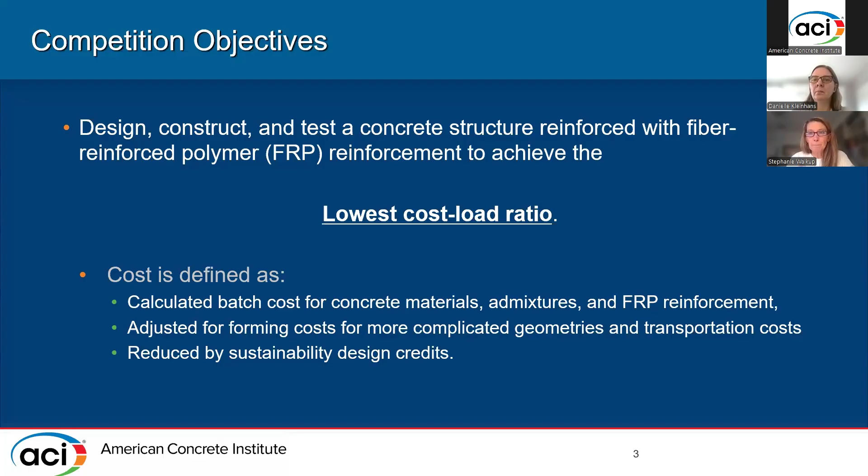One of the other objectives is for you to develop a presentation, again in PDF format, on your specimen design and calculations. You'll include details that are provided in the official mix and cost form, and we want to know the type of failure of your member that you expect to occur. You can predict the failure load and the type of failure using ACI code 440.11-22, which is our newest building code requirements for structural concrete reinforced with glass fiber reinforced polymer bars.

You'll then comply with the rules and the associated dates. Just because we've provided Chapter 22 of the sectional strength of ACI code 440.11 to you, you are permitted to use other calculation procedures or structural modeling procedures to predict failure type and load. So you are not limited to this code document, but we do provide Chapter 22, the sectional strength chapter, to you for your use.

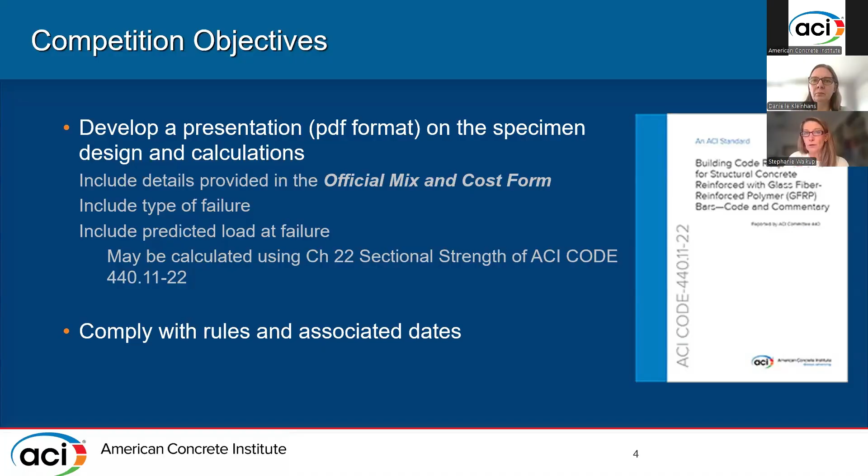We have some learning objectives associated with the competition. One is to understand the similarities and differences between steel and glass fiber reinforced polymer reinforcing bars. We'll start there, and then move through the other learning objectives as we go.

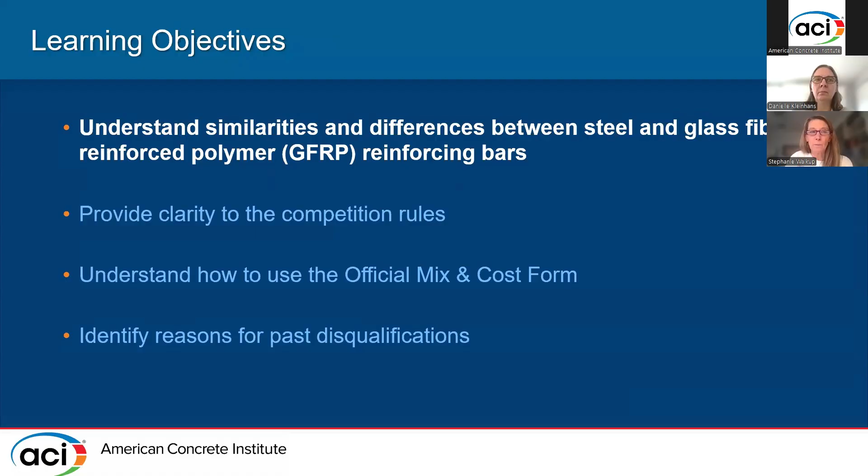Let's talk about FRP versus conventional steel reinforcement. Conventional steel reinforcement is susceptible to corrosion, and as a result of corrosion, which produces expansive forces, concrete can deteriorate and fall off of our concrete members. This reduces the life cycle of our concrete members, and it's not a very sustainable design when this corrosion occurs.

Our FRP materials are a good alternative to reduce corrosion from occurring in these members. Glass fiber reinforced polymers, as well as others, do not rust or degrade from water, chlorides, or chemicals. Because they're non-corrosive, we have longer life cycle and lower life cycle costs.

In addition, FRP bars have a high strength to weight ratio and reduced costs. They're up to 75% lighter than traditional steel reinforcement and have higher tensile strength. This makes them easier to transport, handle, cut, and install, which also reduces transportation and labor costs.

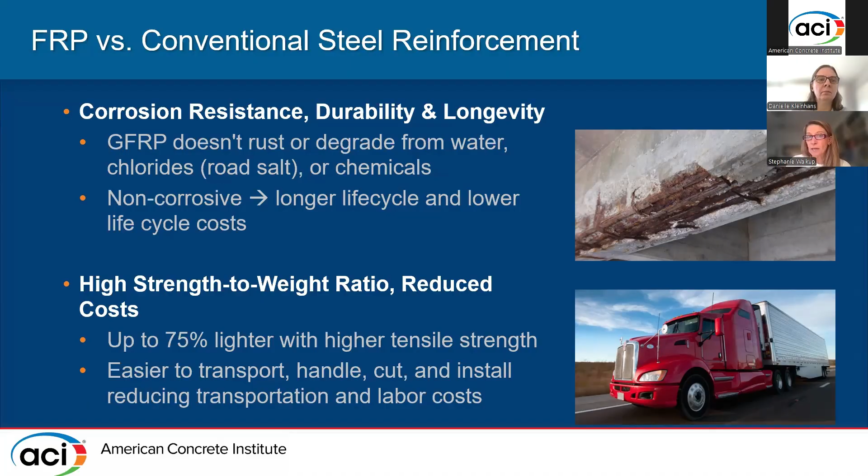They are also non-conductive and non-magnetic as well, and GFRP, as a result, is perfect for sensitive applications like MRI rooms, utility structures, and other areas needing electromagnetic neutrality.

GFRP production actually generates fewer CO2 emissions. It uses less energy, and it can enable the use of seawater and sand, supporting greener construction as well. So there are environmental advantages to the bars as well.

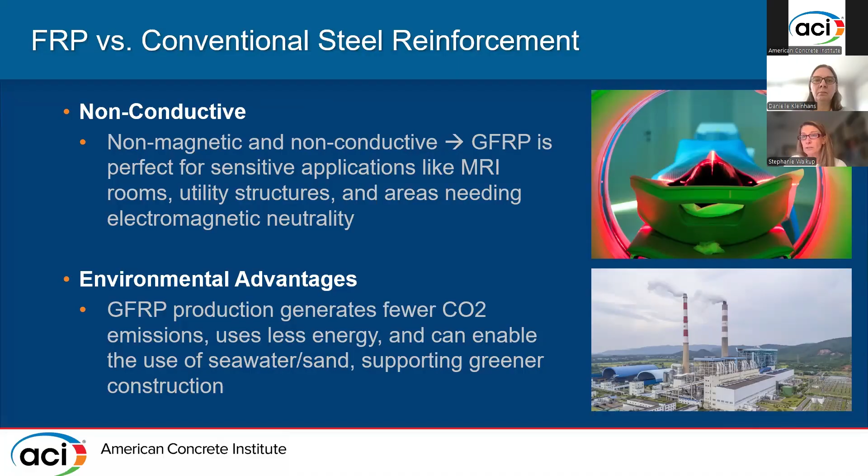In terms of the reinforcing bar properties, we're first going to break this down into the FRP fibers, and then also talk about the epoxy matrix, and then we'll see what happens when we put them together.

If you take a look at the stress strain diagram, we can see that the fibers of the FRP bar are actually stiffer than the epoxy matrix. So when we combine the fibers with the matrix, we end up with a composite bar that has a smaller modulus of elasticity than the fibers, but a higher modulus of elasticity than the epoxy matrix.

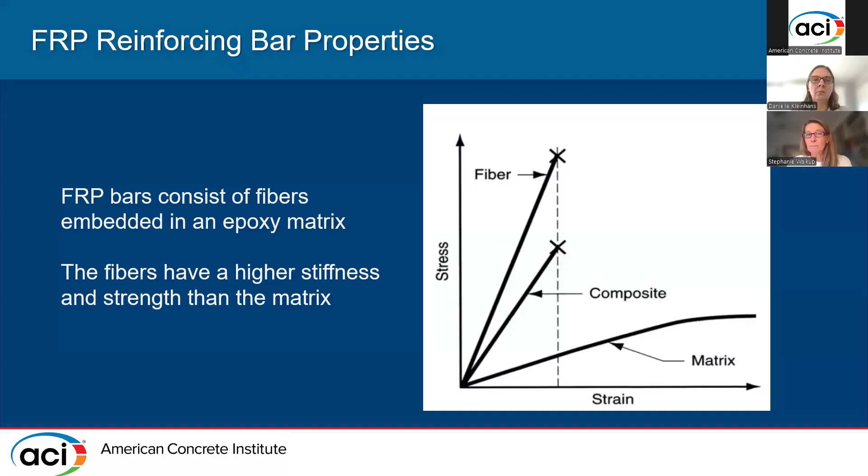When we compare the bars—here we're showing basalt, aramid, and glass bars, along with carbon bars—to our pre-stressing steel or mild steel, we can see that the basalt, aramid, and glass bars have a smaller modulus of elasticity, where they're not as stiff as steel bars. However, they have a higher tensile strength.

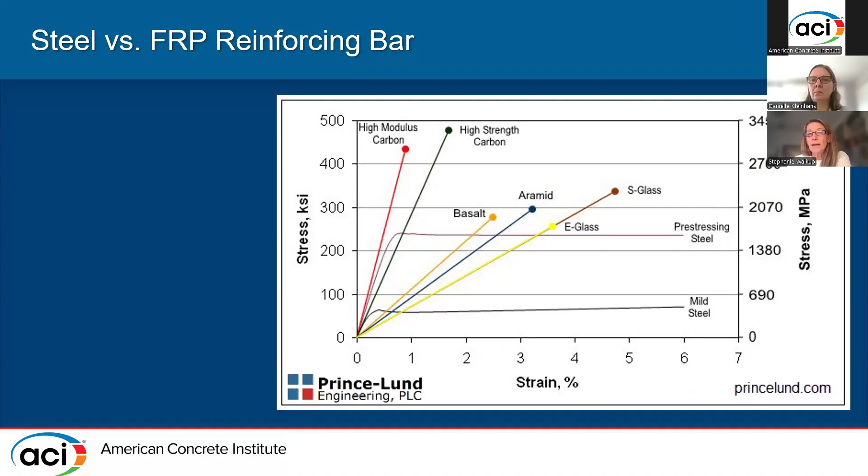Carbon matches approximately the modulus of elasticity of traditional steel bars, but has an even higher tensile strength than our basalt, aramid, and glass bars.

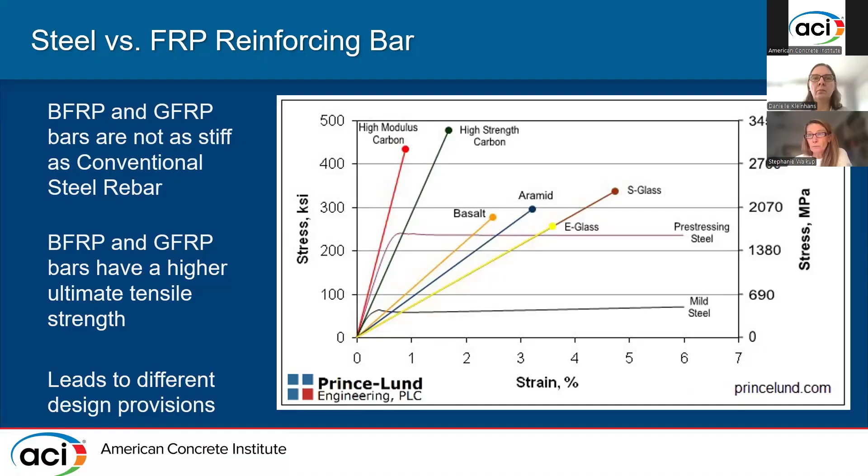As a result of these different material properties, we have different design provisions, and that's what prompted the development of ACI code 440.11-22.

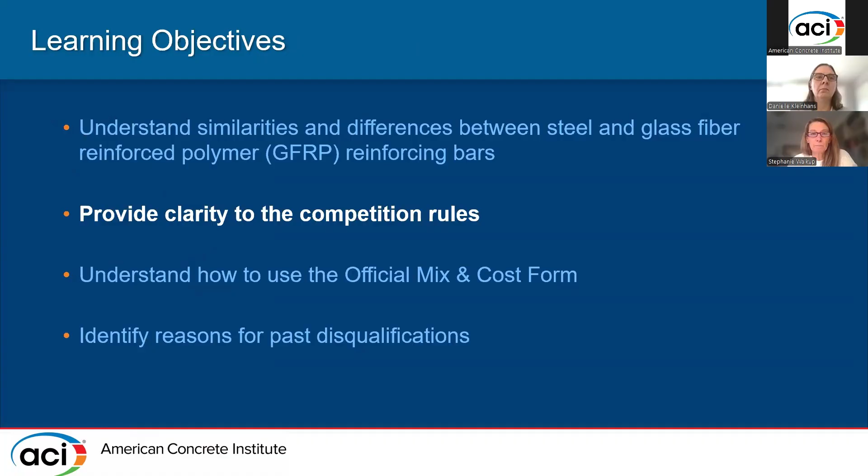We no longer measure displacement of the member as it's being tested, but we are only looking at the ultimate strength that the specimen achieves.

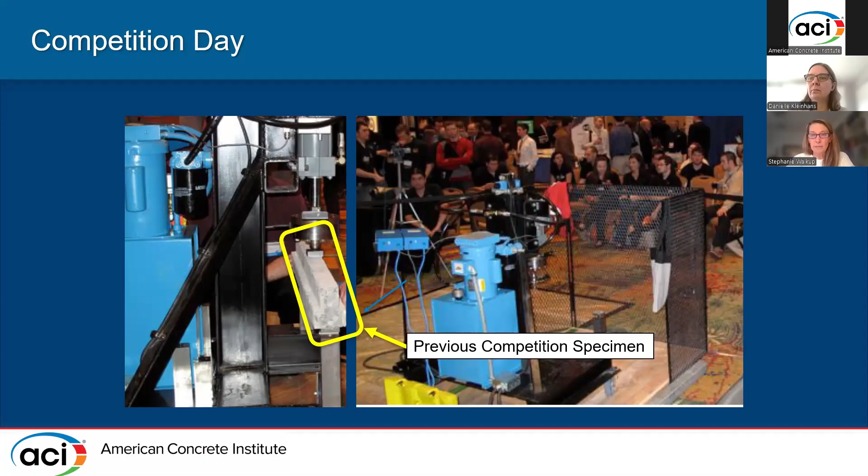So some selected rules that I've pulled out: each school may only enter 1 team. If your school has been participating in this competition for a longer period of time, you may remember that there was a point where we allowed 2 teams to enter, with 2 types of structures permitted. We now allow only 1 team to enter, and there's only 1 type of structure that's permitted.

Each team must have a supervising faculty advisor, and each team must consist of at least 2 and not more than 8 students enrolled in an undergraduate program at any college or university worldwide. It is strongly recommended that at least 1 team member is present during testing of the structure on competition day.

We have had situations where the supervising faculty advisor was the only one present. If you're present, you will be the one that will place your member in the testing machine prior to load application.

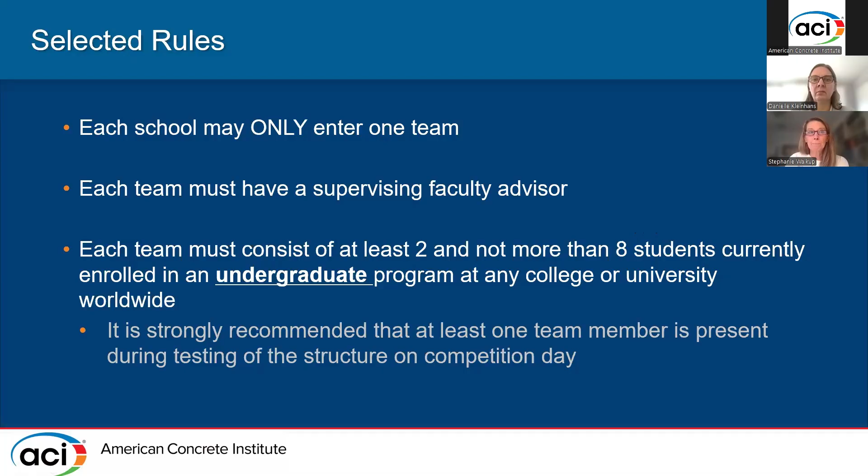Going back to the different types of structures that were permitted previously, we had straight and prismatic, or type 1 structures, and then we had straight but not prismatic, or prismatic but not straight. These type 2 structures are no longer permitted in the competition.

Prismatic and straight members are members that must have a constant flexural stiffness, EI, across their span. The cross-section is symmetrical and constant.

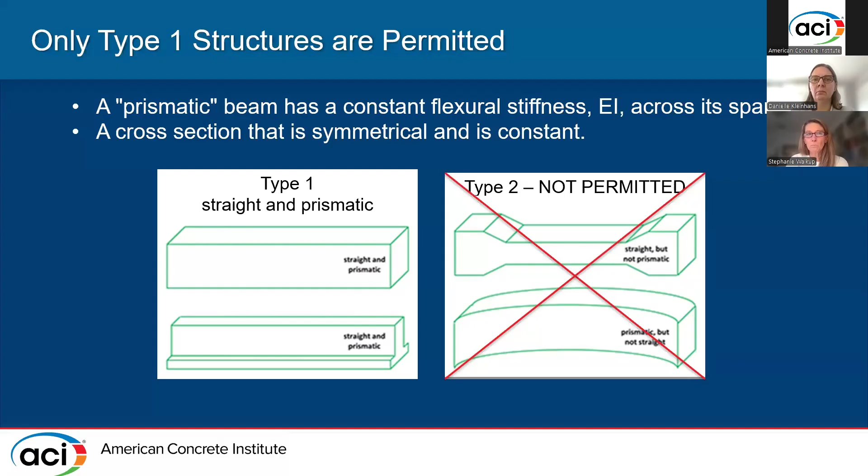We can see here that the length of the specimen must be at least 950 millimeters and must not exceed 1,000 millimeters or 1 meter. We have a center-to-center span of 900 millimeters, so the additional 50 millimeters allows us to have some overhang at each of the simple supports.

The structure must fit into a box measuring 200 millimeters by 200 millimeters by, again, 1 meter or 1,000 millimeters long, and it must weigh between 5 kilograms and 15 kilograms.

You will mark an X designating the 2 loading points that are spaced 250 millimeters apart from the mid-span. We can see that the load is applied now through a spreader beam. The load that we will measure for the ultimate load for the member is the load P at the top. That load P is then spread to 2 point loads that are applied to your specimen, again spaced 250 millimeters apart.

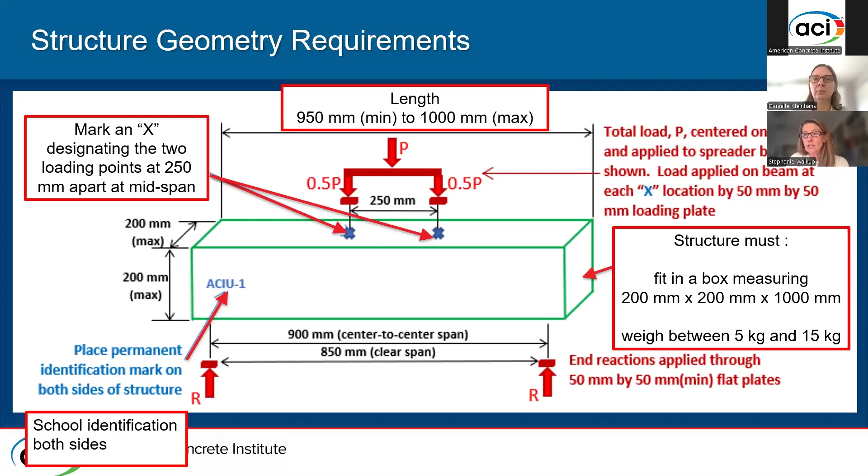The load is applied at each of the X locations by 50 millimeter by 50 millimeter loading plates.

We ask all schools to provide an identification mark on both sides of their beams, indicating the school identification. This may be put on with permanent markers.

Again, the end reactions, as well as the mid-span applied loads, are applied through the 50 millimeter by 50 millimeter flat plates.

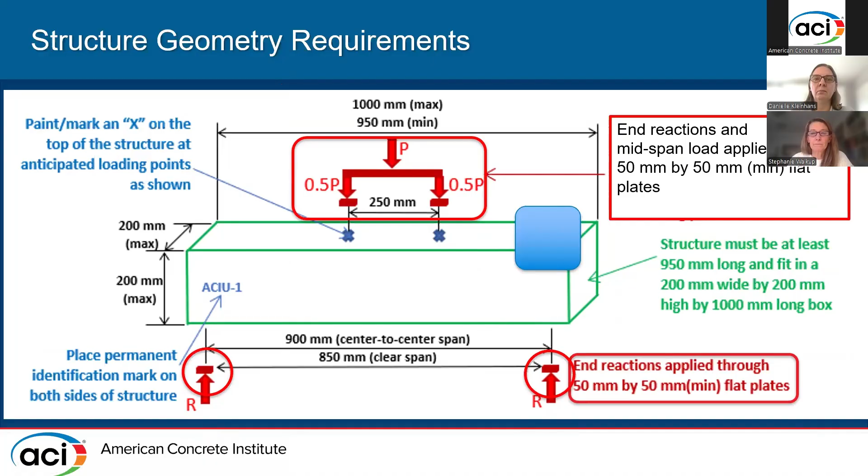The concrete materials that are permitted are those listed in the official mix and cost worksheet. For cementitious materials, you are permitted to use Portland cement, blended cement, slag cement, fly ash, or silica fume. Cementitious materials may not be used to coat reinforcement as a bond-enhancing agent.

Aggregates must be non-metallic, and there was a question that was sent in previously to ACI regarding fibers. Fibers are not classified as aggregates, and fibers are not permitted to be used in your concrete matrix.

Only chemical admixtures meeting either ASTM C260, or chemical admixtures meeting ASTM C494, types A, C, E, F, G, and S are permitted. The different admixtures have varying costs, and you can see those in the mix and cost worksheet.

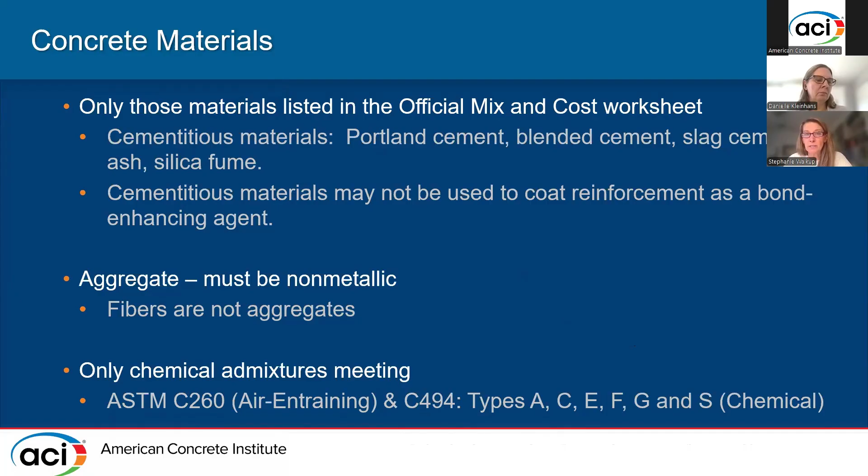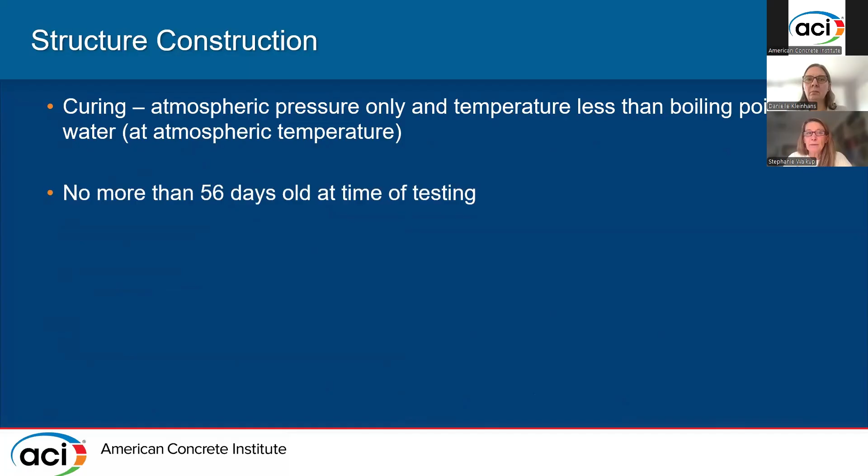For your structure construction, curing must be at atmospheric pressure only and temperatures less than the boiling point of water. The structure may be no more than 56 days old at the time of testing, and no reinforcing supports are permitted in the 850 millimeter clear span.

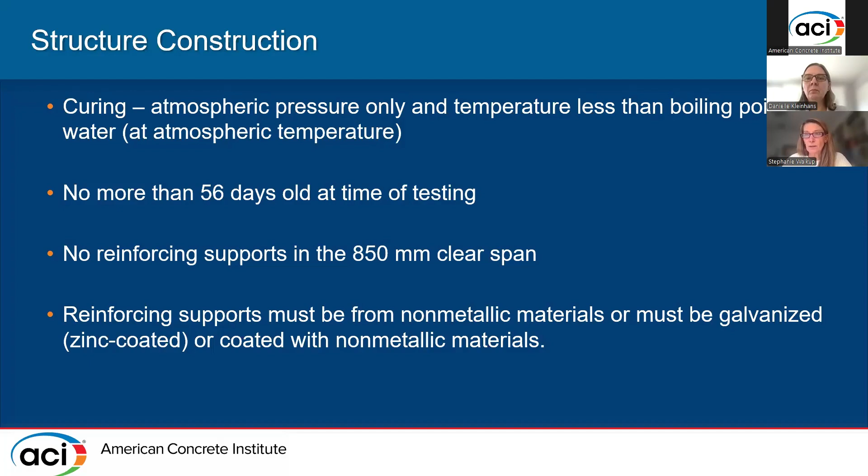Reinforcing supports must be made from non-metallic materials, or they must be galvanized, zinc-coated, or coated with non-metallic materials. This has been a point of disqualification in the past.

Reinforcement must be the FRP reinforcement that is provided to you by ACI in our official kits. This has also been a point of disqualification in the past when we've identified bar sizes that are larger or of a different manufacturer than what we have provided.

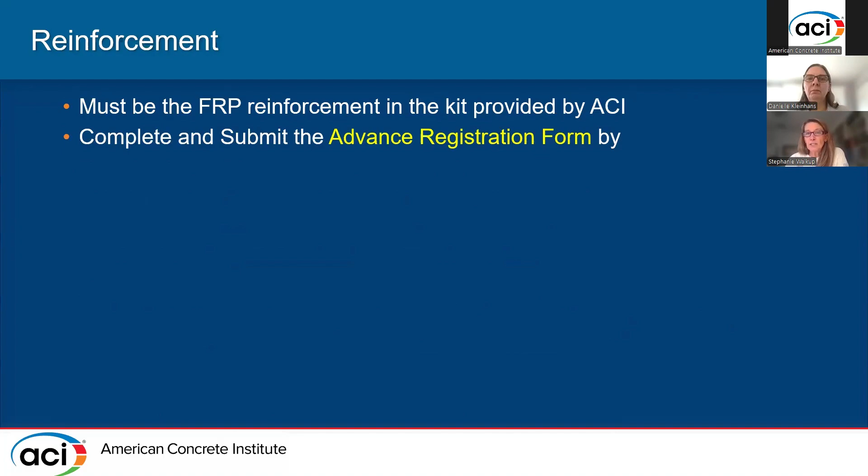Student teams must complete and submit the Advance Registration Form again by February 3rd to receive their kits. You also must include, at a minimum, one full piece of FRP bar. That bar may be cut in any manner that you wish.

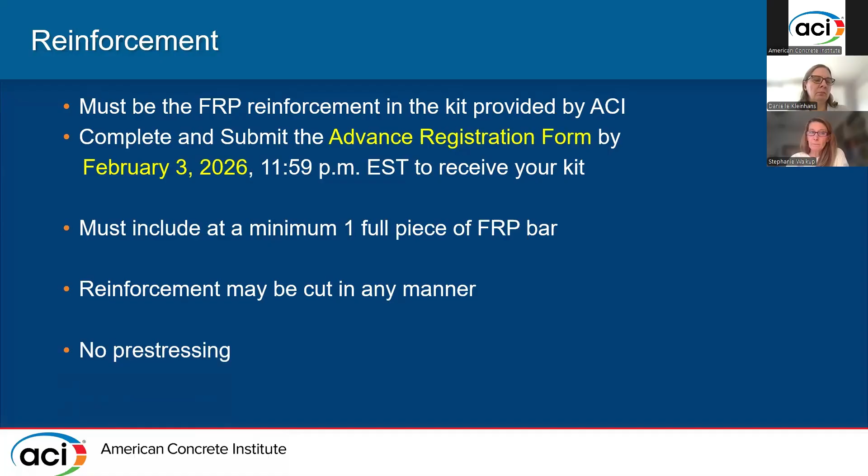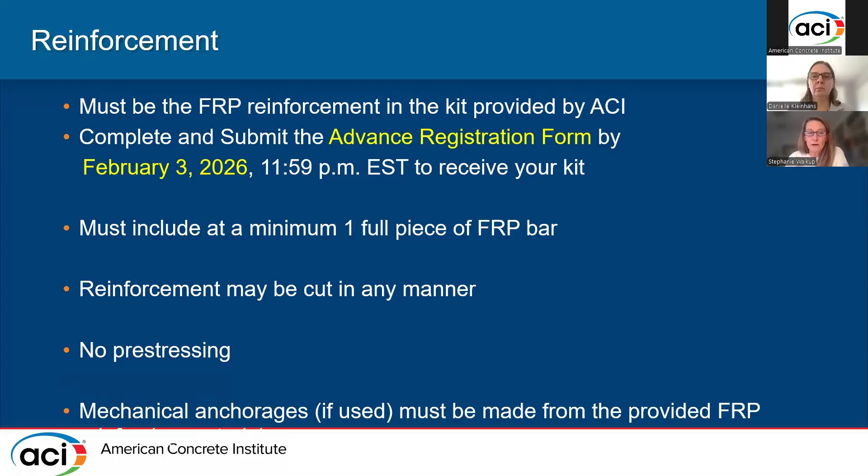No pre-stressing of any of the bars is permitted. And mechanical anchorages, if used, must be made from the provided FRP bars in the official ACI kit.

The permitted FRP bars that are going to be provided to you in your kit, if you have not received it yet, include the following 6: Strongwell composite bar, MST bar, Pultrall VROD, SFTec SFT-BAR, Gatorbar, and Mateenbar Greenbar2X. They are all identified by a colored tape that will be wrapped around the bars when you receive your kit.

You can also compare the images of the bars to the bars when you pull them out of the kit, in case any of the tape has been rubbed off in the process of shipping.

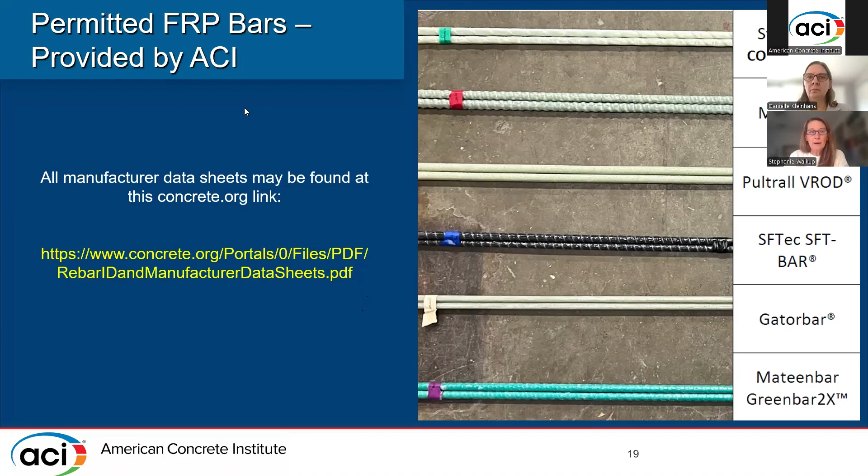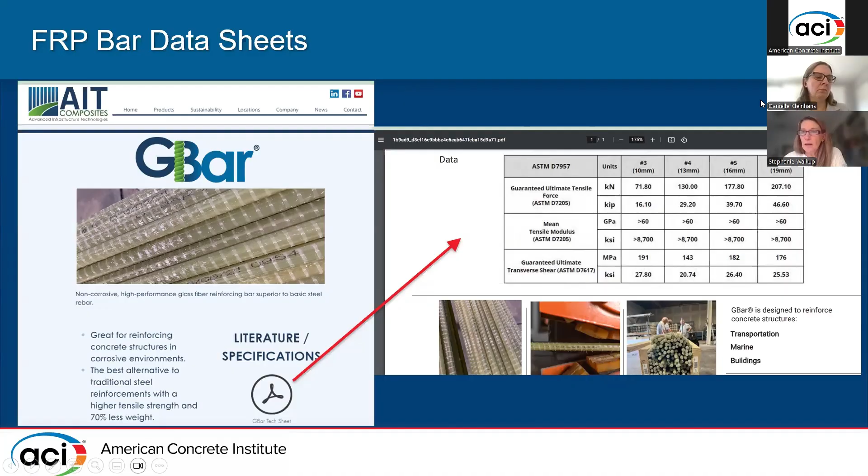Items that are included in the data sheets include the guaranteed ultimate tensile force of the bar, as well as the mean tensile modulus, and the guaranteed ultimate transverse shear. The first two are the primary materials that you're going to want to investigate and use as part of your strength calculations.

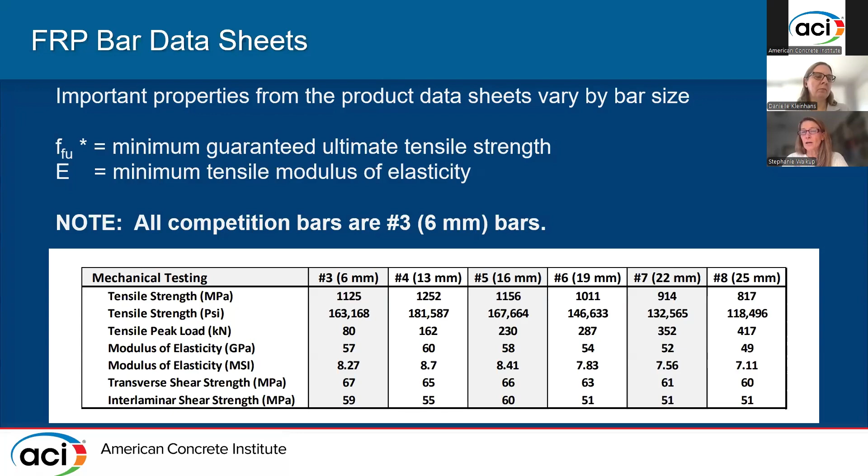As mentioned, the important properties of the bars will be provided to you in the product data sheets. It's important to note that these strengths and stiffnesses may vary by bar size, and an example of that is provided here. All competition bars included in the kit are number 3 bars, so if you open the manufacturer's data sheet, you are looking for material properties associated with a number 3, or 6 millimeter, bar.

As mentioned before, ACI 440 and ACI as a whole are providing Chapter 22, Sectional Strength, of ACI code 440.11-22 to you. This may be used to calculate the flexural strength and shear strength of your member. You can also look at bearing strength and other strengths associated with this chapter.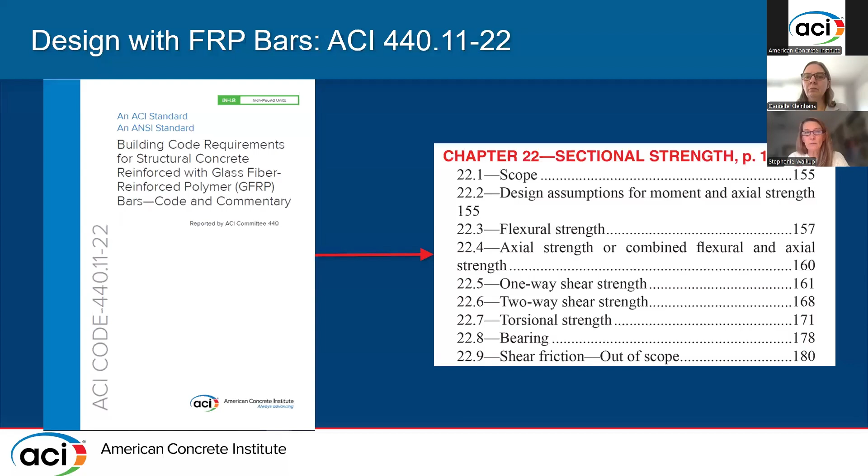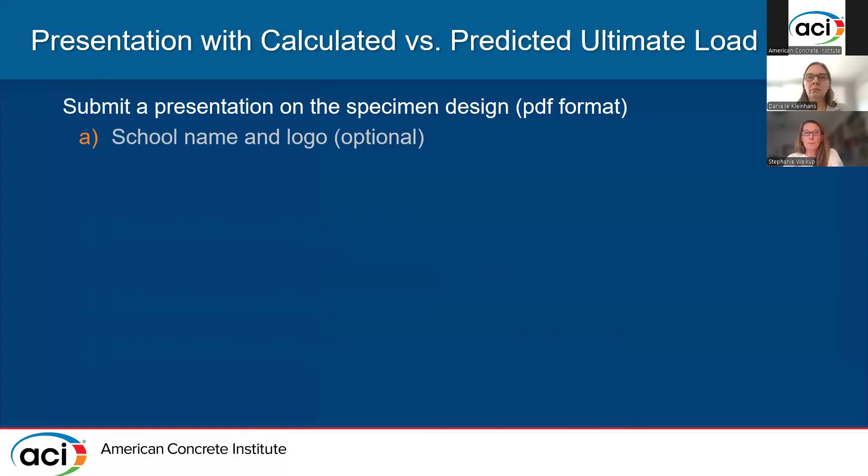For the presentation, you can include calculated as well as predicted ultimate loads. You'll submit the presentation on the specimen design in PDF format. You must include your school name, your logo which is optional, your structure identification mark, the student team member names, and your faculty advisor.

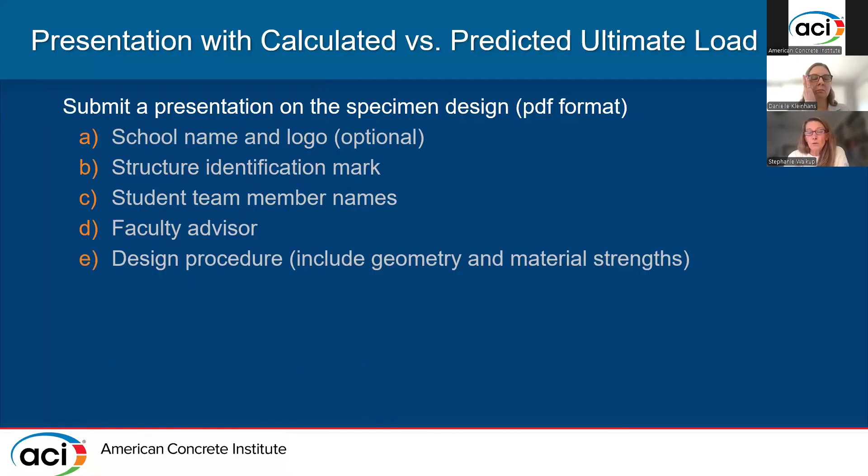You'll then move into your design procedure. In order to present a design procedure, you'll need to share with us the geometry of your cross-section, the length of your member, and predicted material strengths based on your concrete mix design. The calculated ultimate load should also be included, including the theoretical type of failure.

Again, you may use ACI 440.11-22, Chapter 22, or you may calculate the ultimate load using other techniques. You'll also provide a predicted ultimate load, and this can vary from what you calculate. Maybe you are predicting a certain concrete strength and you think you didn't achieve that, and you want to predict a load that is a little less than what you've calculated.

Maybe you anticipate your strengths being higher and your bar being slightly stiffer than what the manufacturer reports. Maybe you want to increase the ultimate load that you intend to achieve. Again, this is up to the team individually, and we're looking to see both the calculated load and the predicted ultimate load. They may be the same, but they may also vary. If they vary, we do ask that you provide an explanation of the difference.

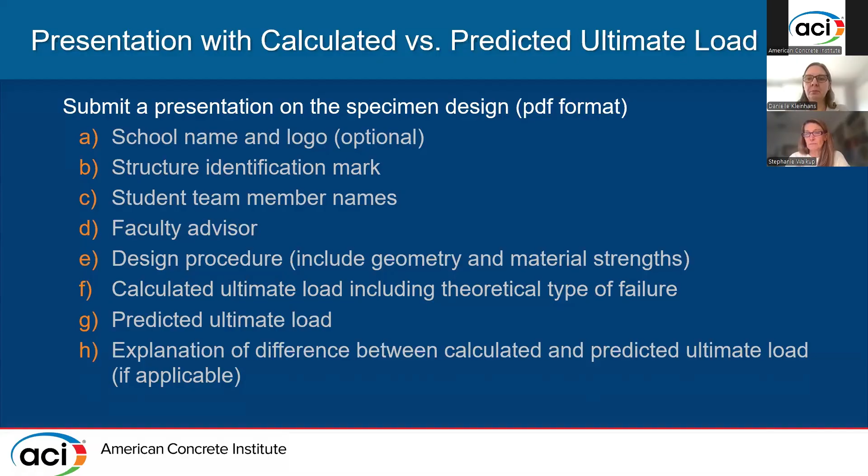I've mentioned this a few times previously, so I won't spend any more time here, but this is just the code document that will be provided to you.

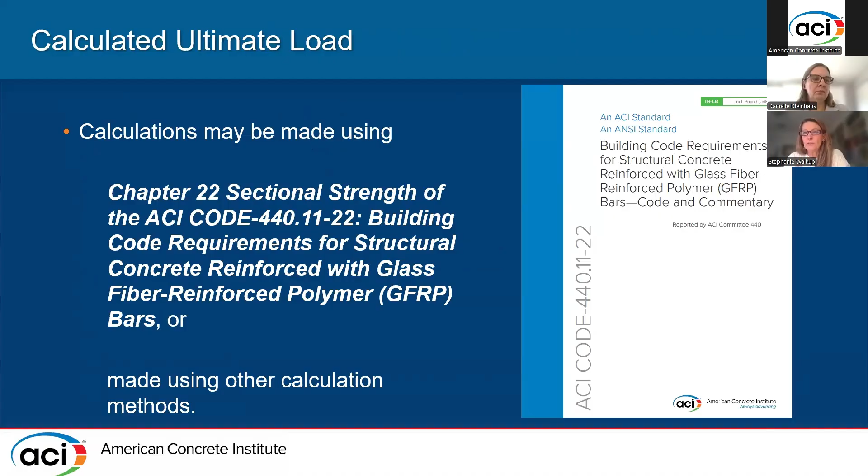Next, let's move into the official mix and cost forms. Some modifications have been made to this form since the previous competition. We have included a tab 5 this time. So when you open the official mix and cost form, there are 5 tabs at the bottom of the form now instead of 4. The instructions are included in tab 1. Then you will utilize either tab 2A or 2B to do your actual mix and cost work.

Tab 3 is where you will develop and place your FRP reinforcing diagram. We want to see the cross-section of your member, the length of the member, as well as where you're placing reinforcement and the lengths of the reinforcement. You should identify the manufacturer of the bar that you have selected as well. Tab 4 is unit conversions that are embedded in the spreadsheet, and there is no work for you to do on this tab.

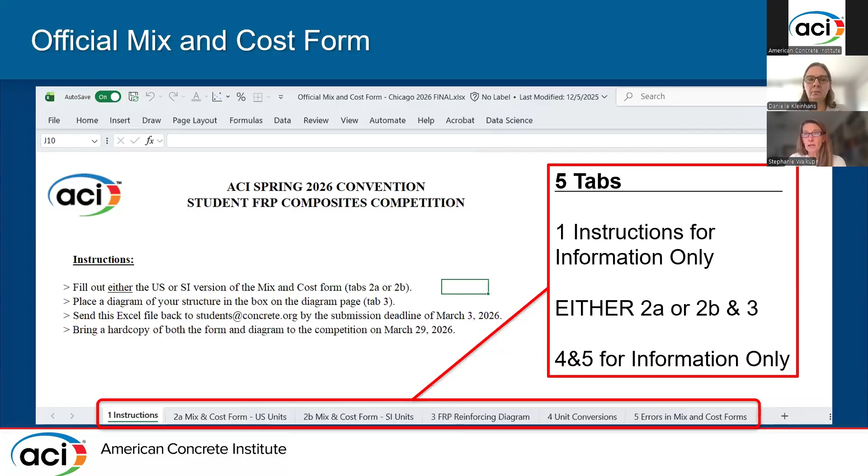Because students have had difficulty understanding the mix and cost form in the past and have submitted forms with errors to our committee, we have provided some checks along the way in the spreadsheet. If errors occur in the spreadsheet as you move through it, those errors are explained in tab 5, Errors in Mix and Cost Forms. We thought this would be an easier approach rather than you sending the mix and cost form to us in an incorrect manner and us sending it back to you.

With the official mix and cost form, the spreadsheet tabs are locked down so that you may only enter data in the light blue cells. As mentioned, you'll work with either tab 2A or sheet 2B. 2A provides US units and tab 2B uses SI units. Make sure to complete all cells in the mix and cost form, or it will be returned to you. If a value is 0, not applicable, or none, simply enter 0, NA, or none.

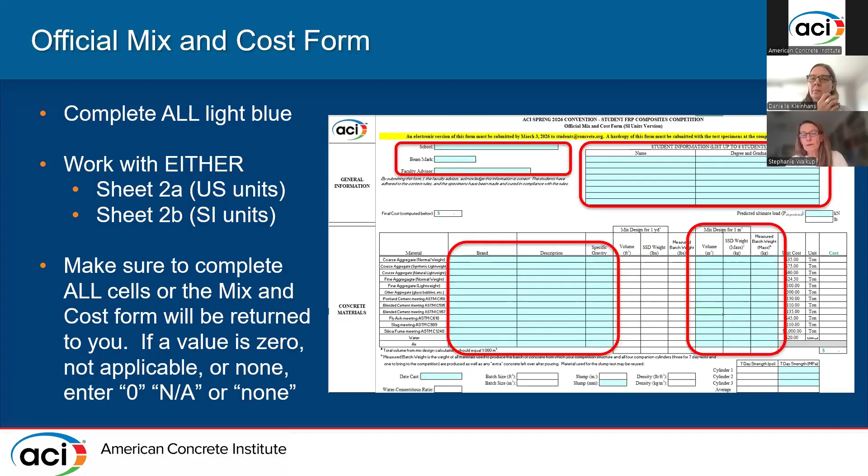This is an example of the form where you can see the general information at the top: your school, your beam mark, the faculty advisor, and all of the student names with degree and graduation dates. There is also a cell for entering your predicted ultimate load. Please don't forget this isolated cell.

We have returned mix and cost forms for students who have not entered that value. As a reminder, students are to be at the undergraduate level for this competition. The concrete materials available have been expanded because we identified student teams using more than one lightweight material in their concrete mixtures. In the past it was coarse aggregate, fine aggregate, and lightweight aggregate. We have now broken that down into synthetic lightweight coarse aggregate, natural lightweight coarse aggregate, and fine lightweight aggregate.

You can see those expanded right here. Synthetic lightweight aggregate is manufactured aggregate, often by heating clays and shales, and is defined primarily by expanded clay or shale. Natural lightweight coarse aggregates are sourced from volcanic sources like pumice or plant-based materials. Fine aggregate, like sand, is defined as that passing a 4.75 millimeter sieve, whereas coarse aggregate, like gravel or crushed stone, is retained on the 4.75 millimeter sieve. As noted earlier, fibers are not considered an aggregate and are not permitted in the competition.

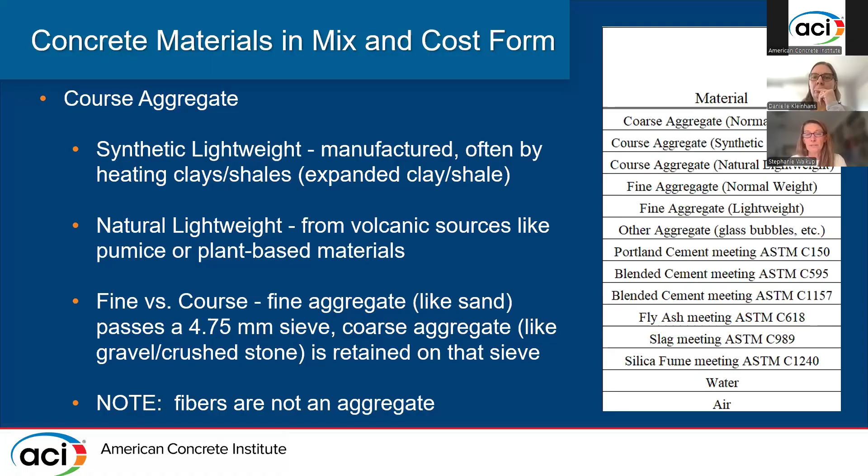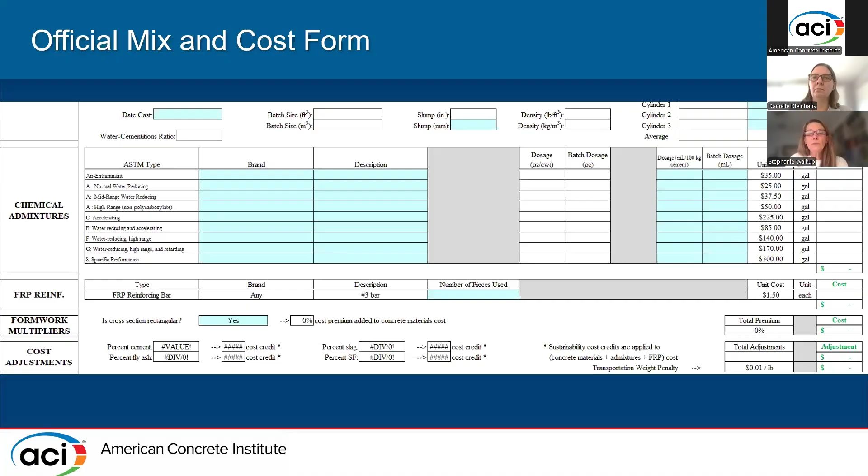The rest of the spreadsheet calculates automatically in a pre-programmed state. If you have any errors, they are most likely to occur in the total volume for the mix design. Here we have a mix design for 1 cubic meter, meaning when you total up your volumes, you should total up to 1.00 cubic meters. If you were working in US units, your mix design should total up to 27.0 cubic feet, which is the equivalency of 1 cubic yard.

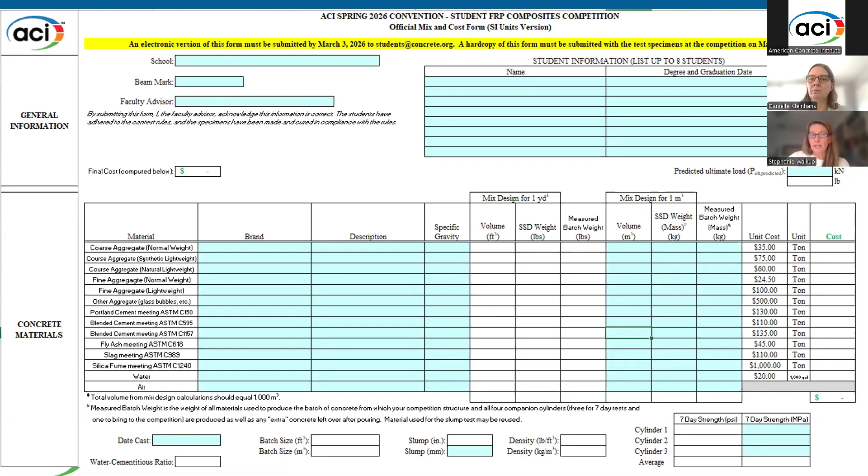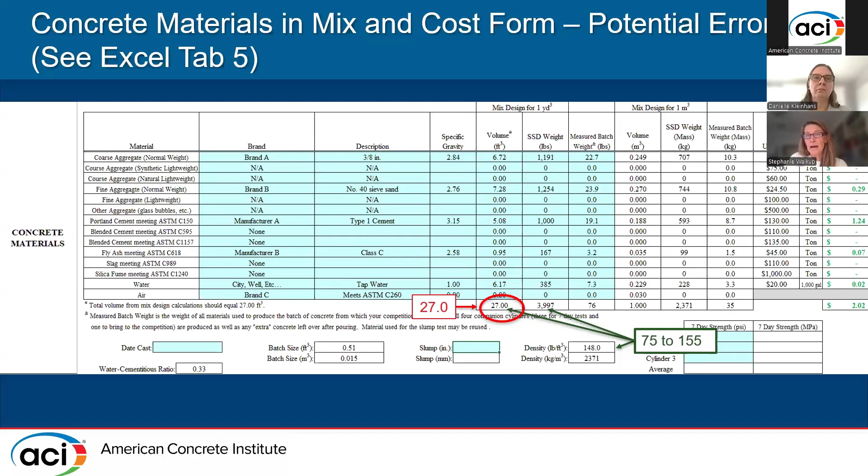We also see that the volume and the saturated surface dry weights are used to calculate density in your spreadsheet. The spreadsheet is set up with pre-programmed cells to calculate density based on the saturated surface dry weights and volume you enter. If this density is not between 75 to 155 pounds per cubic foot, you will receive an error in your spreadsheet, explained in tab 5.

The water to cementitious ratio is also calculated for you by the spreadsheet. It is equivalent to the weight of water divided by the weight of all the cementitious materials, including the blended cements, Portland cement, fly ash, slag, and silica fume. Batch size is calculated automatically and is equal to the batch weight divided by the density.

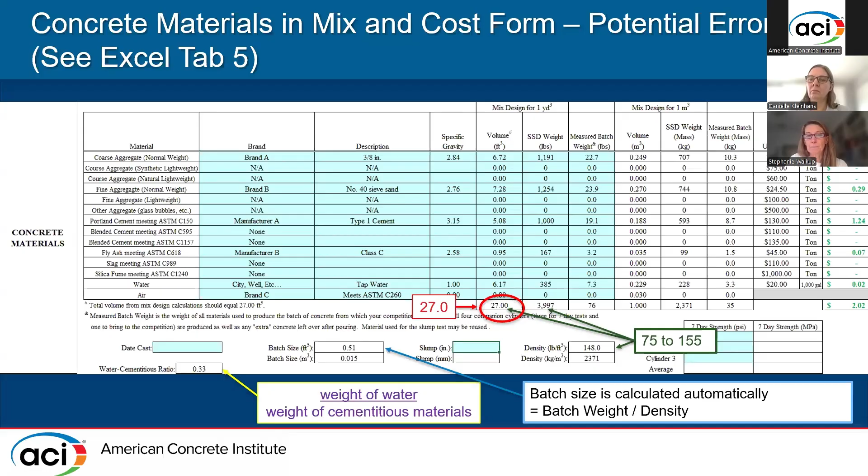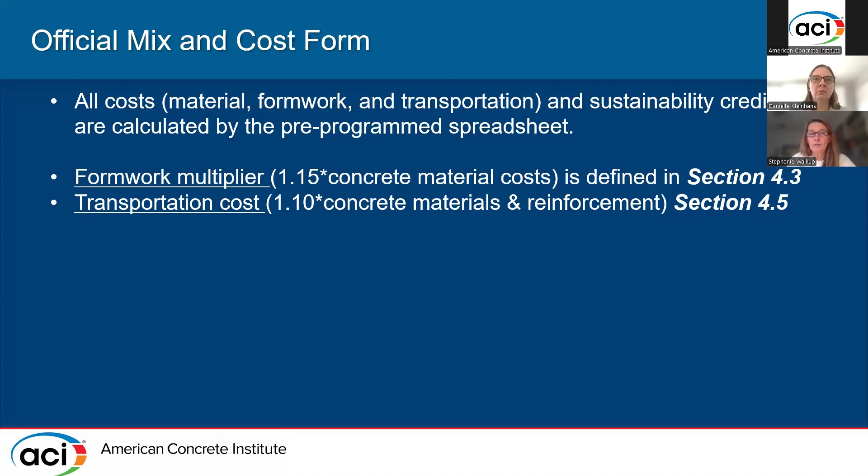All costs and sustainability credits are calculated in the pre-programmed spreadsheet. A formwork multiplier of 1.15 is multiplied by the concrete material costs when you do not have a fully rectangular cross-section, explained further in section 4.3 of our official rules. Transportation cost is new and is related to the concrete materials and reinforcement, a factor of 1.10 times these materials, explained in more detail in section 4.5. The formwork multiplier and transportation costs increase the cost of your specimen, whereas sustainability credits reduce the cost of your specimen.

They are explained further in section 4.4 and have not been changed since our previous competition. For cement values less than 15%, you will receive a credit for your cost. For fly ash greater than 20%, you will receive a credit. You can see here that while there is 25% cement content, we don't meet the 15% requirement for credit, so you'll receive 0% for sustainability. Because fly ash was used but not in significant quantity, there is no credit applied. If these values were less than 15% or greater than 20%, you would see the cost credit calculating in the spreadsheet.

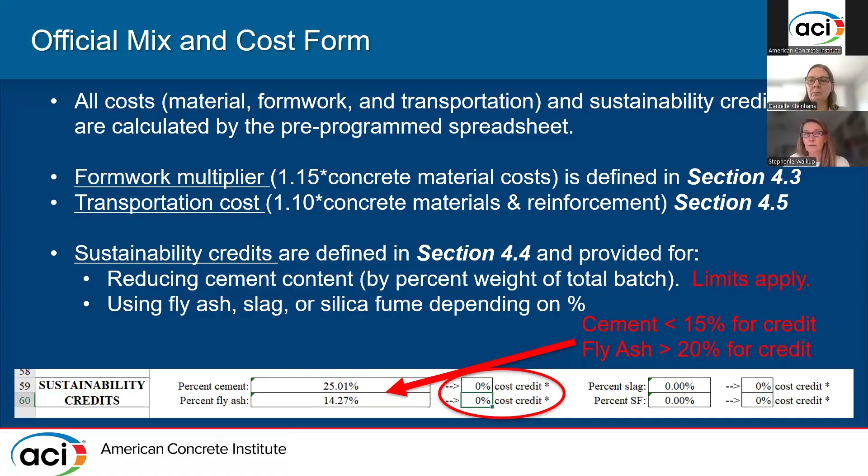The cost for reinforcement is per bar. So using 1.5 bars will require you to input 2 bars into the spreadsheet. It is the number of pieces used as a whole number. A minimum of 1 full length of bar must be used. Any of the bars can be cut and the bars can be mixed. You may choose 1 Mateen bar and 1 Gator bar and incorporate both in your design.

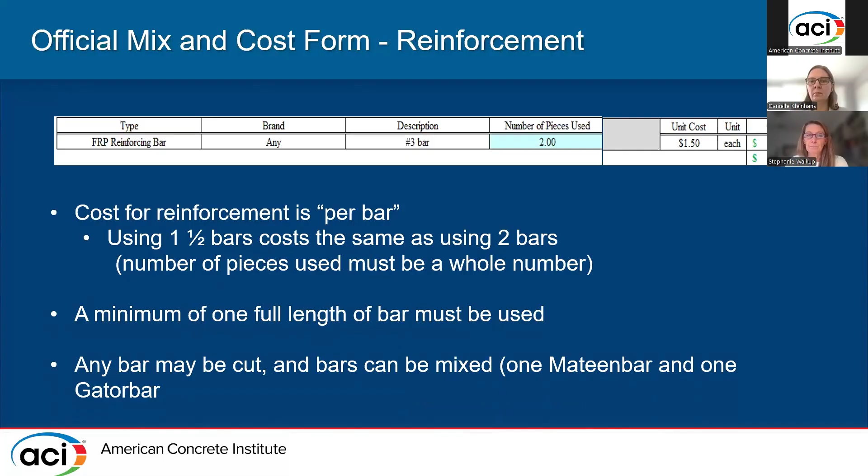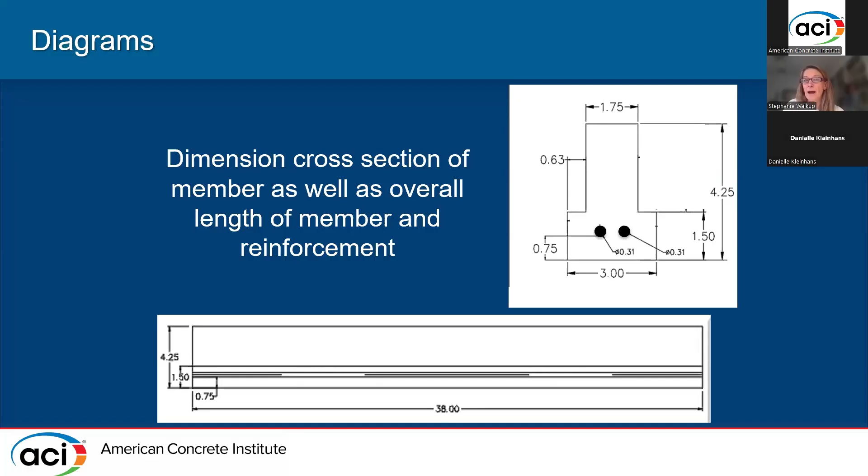Dimension cross-sections of members as well as the overall length of the member and reinforcement are required in the diagram tab, which is sheet 3. We are looking to calculate the volume of your specimen, so we want the cross-section to be fully dimensioned as well as the length of the specimen. We also would like you to identify the FRP bars you've used by manufacturer. That is not detailed on this slide.

We'll now step through the evaluation process. You have 2 ratios that we will calculate to use for your ranking points. The cost to load ratio is R1, calculated as the cost coming out of the mix and cost form divided by the ultimate load measured on testing day. The maximum load prediction ratio is variable R2. We calculate that as the predicted load minus the measured load, divided by the measured load, then multiplying by 100%.

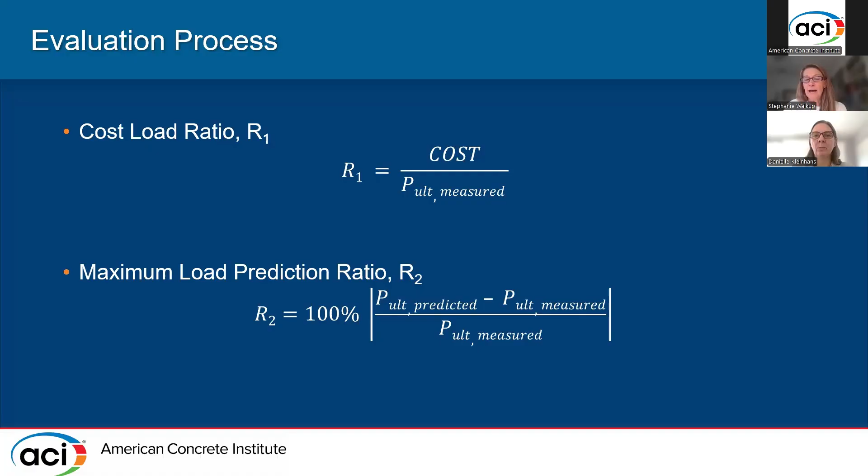We're also incorporating presentation scoring this year. Presentations were required for the Boston competition, but a presentation factor score was not included in the scoring process. This year, if the presentation is very well put together, as evaluated by the categories shown in the left column, the student team will receive a check plus, and a presentation factor of 0.9 will be applied to the final ranking. If sufficient but not exceeding expectations, they receive a presentation factor of 1.0. If the presentation is limited, difficult to follow, not clearly identified, and has inconsistencies, a check minus will be given with a presentation factor of 1.1.

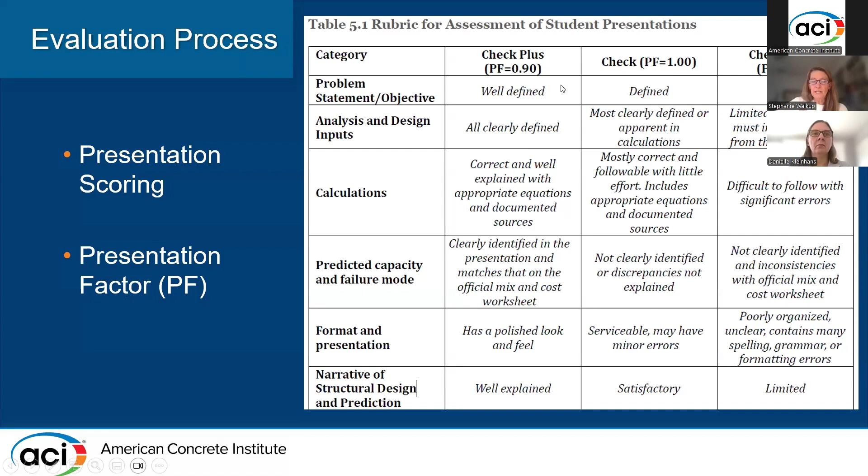For the evaluation process, teams will be ranked in ascending order 1 through 50 - we're allowing 50 teams this year - in each of the 2 categories. The final ranking points will be calculated as 0.5 times the presentation factor times the ranking for R1, plus 0.5 times the ranking for R2.

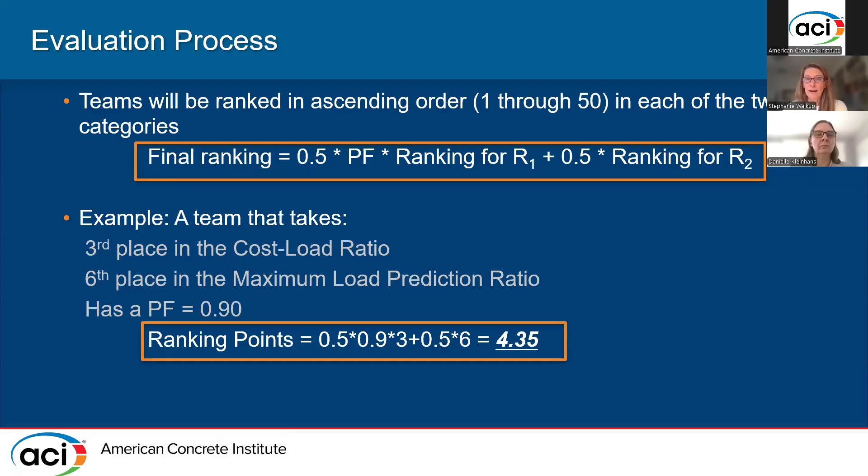For example, a team that takes 3rd place in the cost load ratio R1, and 6th place in the maximum load prediction ratio, and receives a presentation factor of 0.9 for a very well put together presentation, their ranking points will be calculated as 0.5 times the presentation factor of 0.9 times the ranking of 3rd place, plus 0.5 times the ranking of 6th place. That will give them a score of ranking points 4.35.

Ties, if they occur after the final ranking points are calculated, will be broken by the ranking in the cost load ratio category, R1.

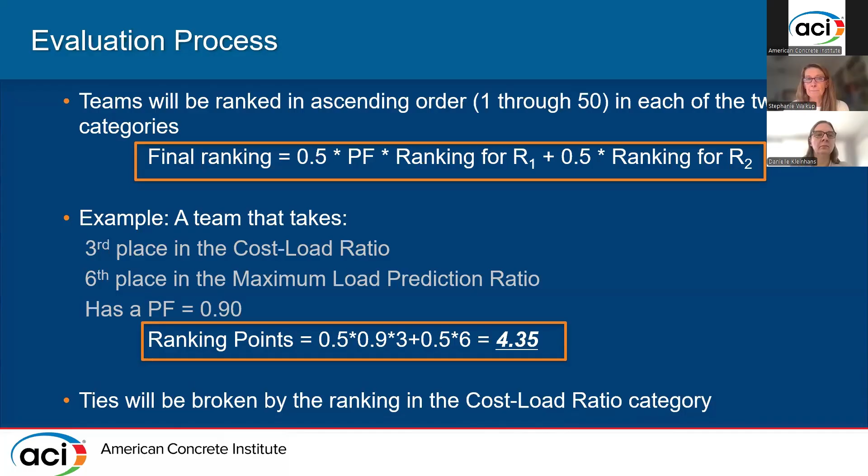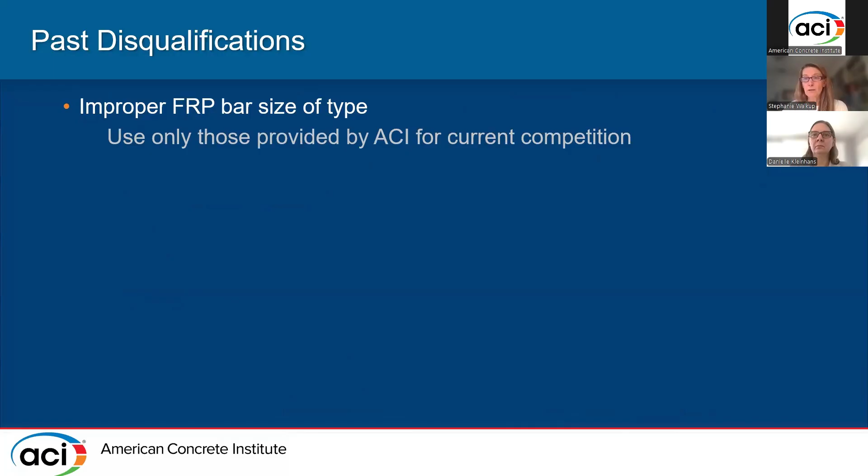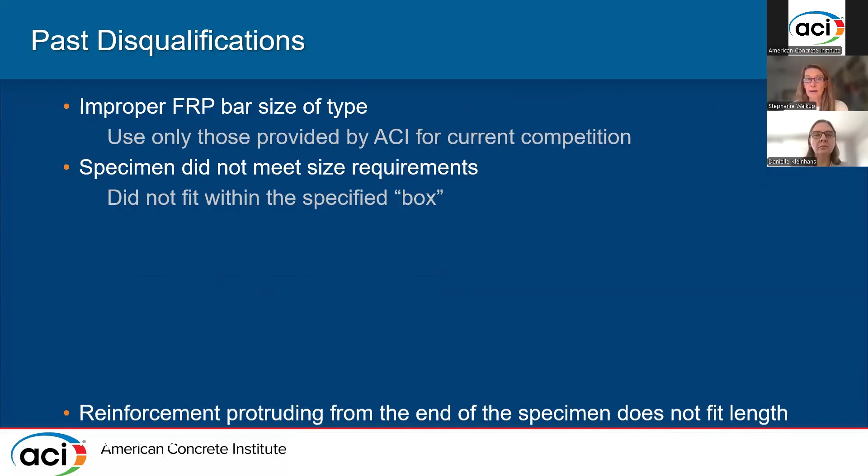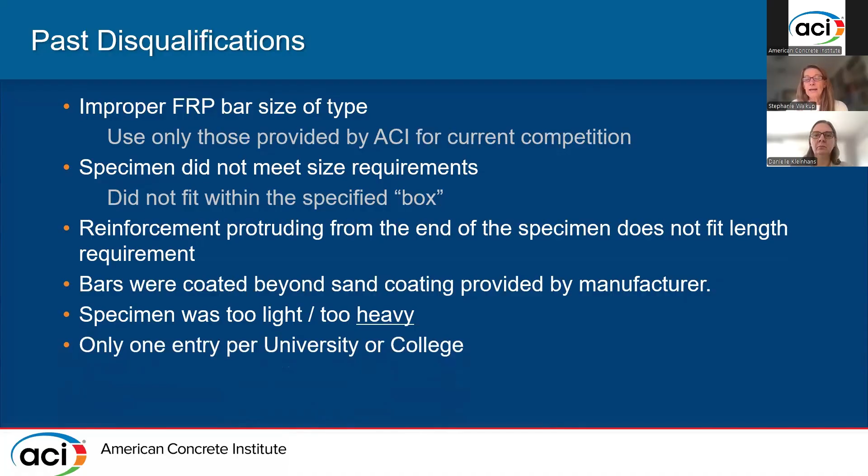Past disqualifications, as I've mentioned throughout the presentation, have occurred for FRP bar size and type used beyond those provided by ACI, specimens that don't meet the size requirements or fit within our 200 millimeter by 200 millimeter by 1000 millimeter box, reinforcement protruding from the end of the specimen that does not fit the length requirement, bars coated beyond sand coating provided by the manufacturer, the specimen being too light or too heavy, and multiple members being brought by the teams.

We've also had disqualifications for the official mix and cost form not being completed sufficiently. While we have sent these back to teams in the past to allow corrections, some teams ultimately still were not completing the form sufficiently. We have taken some steps that we hope will improve this moving forward.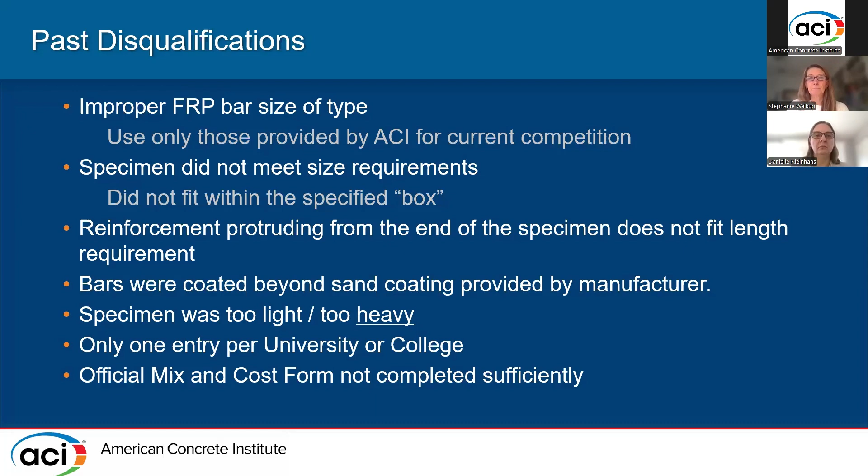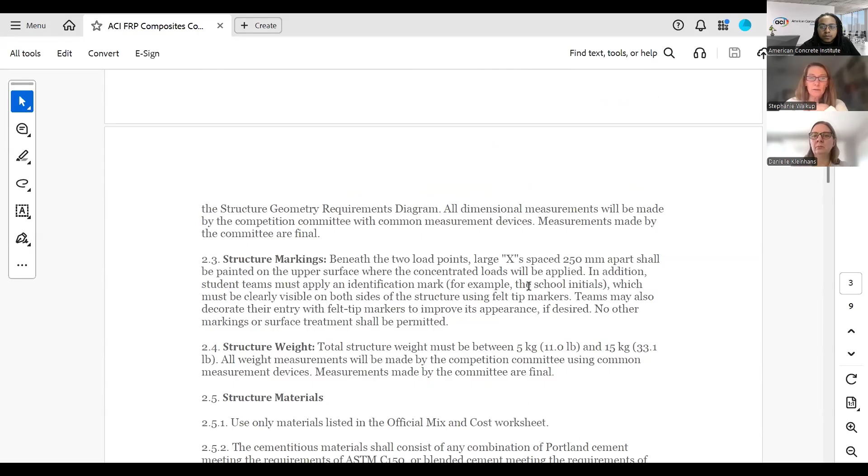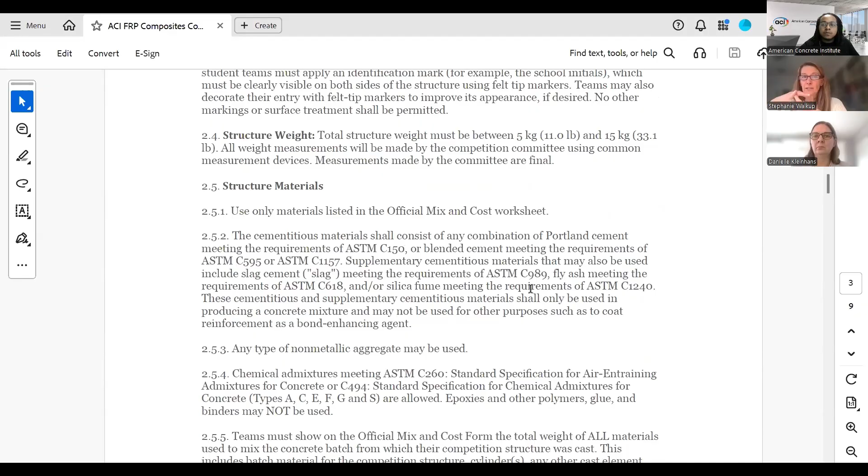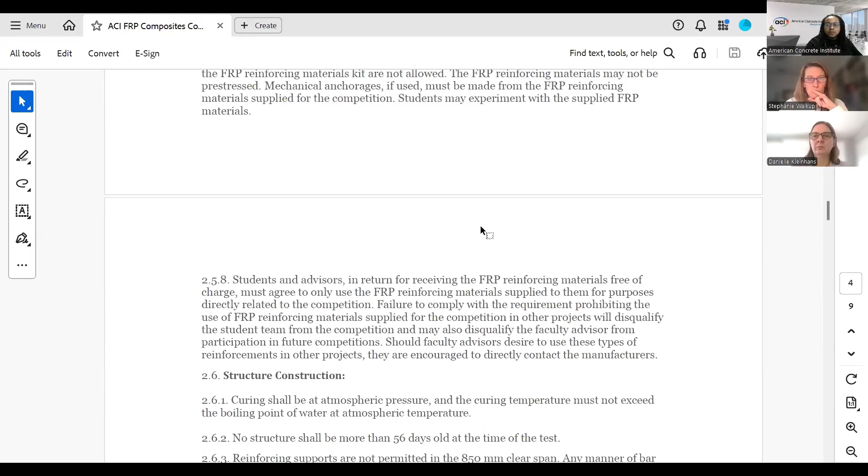That includes, and I should have mentioned this, you need to bring cylinders. Let me pull up and share that screen, Jaden, because this is another point. You need to bring a cylinder to the competition with your materials as well. So when you batch materials, you will batch the volume needed for your specimen, or two if you're going to cast two, plus the volume needed for the cylinders. We need... let me find the section here. Sometimes finding this is more difficult.

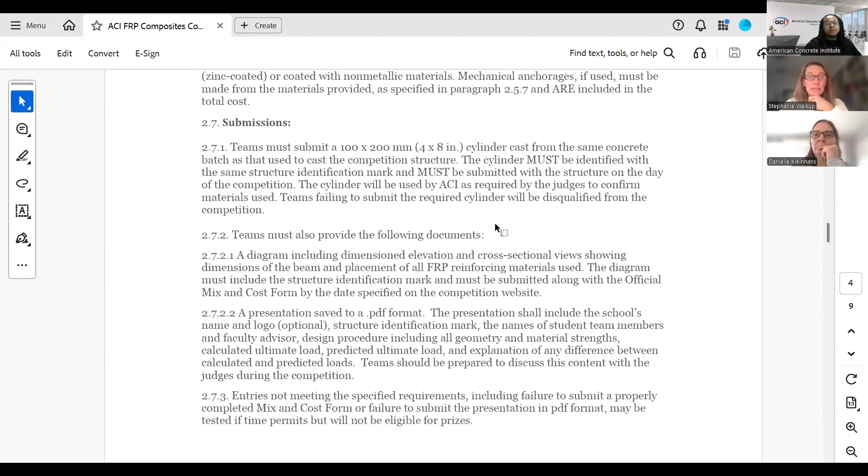And you also need to do a slump test. If you hit Control F, you can type in what you're looking for. Yeah, that's what I always do. I know I have it up here too. Sometimes I think I can find it better, but maybe I can't. Here, I found it, Jaden. I did.

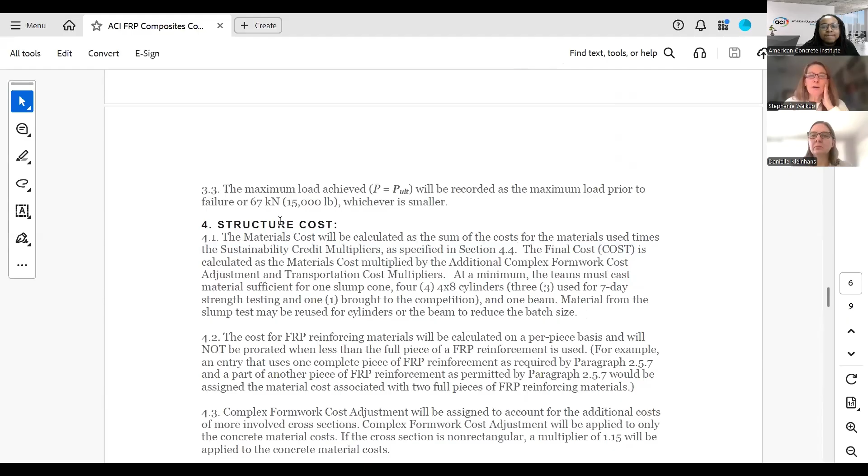Okay, material costs are calculated as the sum of the costs for the materials used in the batch, times the sustainability credits in terms of section 4.4, and the cost with the material cost multiplier and additional complex formwork cost adjustment and transportation cost multipliers.

At a minimum, the team must cast material sufficient for one slump cone and 4x8 cylinders. You need 3 cylinders that you test at 7-day strength, and you will report that strength in the official mix and cost form.

You also must bring with you to the competition, with your specimen, 1 4x8 cylinder. We weigh that cylinder at the competition, and we weigh your specimen at the competition. We use these for density calculation and to verify materials are as you entered into the spreadsheet. So I think that answers that question.